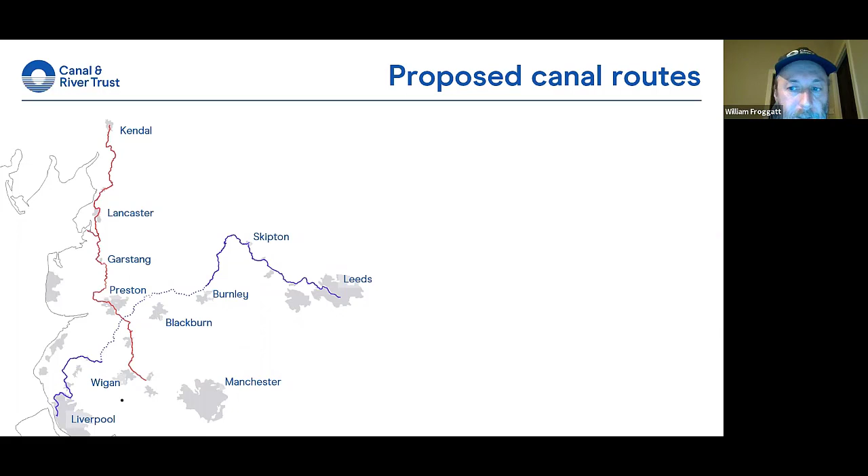And the reason why they eventually got their act together and agreed a route and started building it was because - let me just show my next screen - this shows progress of canal building by the 1780s. You'll see there was a canal from Gargrave to Leeds in the east, and there was a canal from Wigan to Liverpool in the west, and there was no canal in the centre. Remember, that was the bit that was going to go down the Ribble Valley.

But in 1790, when they were looking to complete the canal, they decided to change the route of the canal.

And instead of going down the Ribble Valley, they decided to take it down via Burnley, Blackburn, Chorley to Wigan, because there was coal in Burnley and coal in Blackburn.

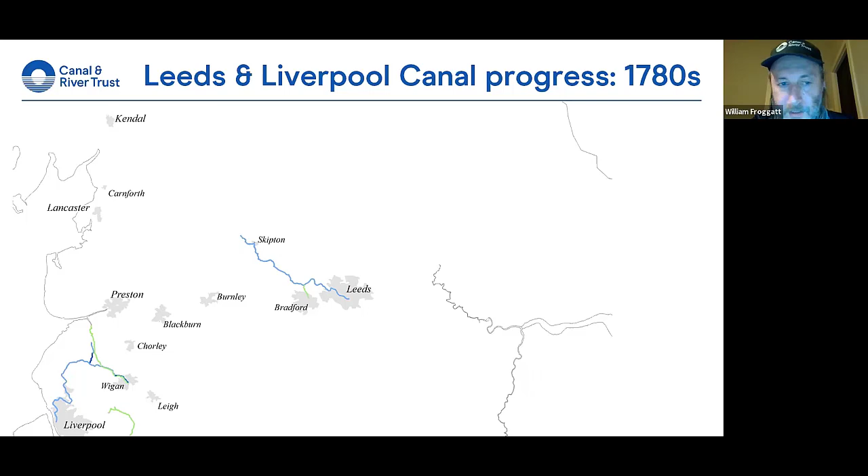Well, that proved to be a bit of a problem for the Lancaster Canal. If I just show you this next map, it's worth having a look at this in a bit of detail. You'll see here we've got Wigan, we've got Liverpool, and Leeds is over on the right hand side.

...the deviation of the Leeds and Liverpool Canal would cause a problem here, because it would be impossible politically to have two canals running next to each other just here. The landowners would never agree to something like that. And also there would be a shortage of water - there wouldn't be enough water to supply two canals.

So the Leeds and Liverpool Canal actually started what you might call a dirty tricks campaign, spinning - if we can use that modern term - against the Lancaster Canal, saying that it would never be built, so support our deviation. And this is what really made the Lancaster Canal get their act in gear and devise a route for their canal and get their Act of Parliament.

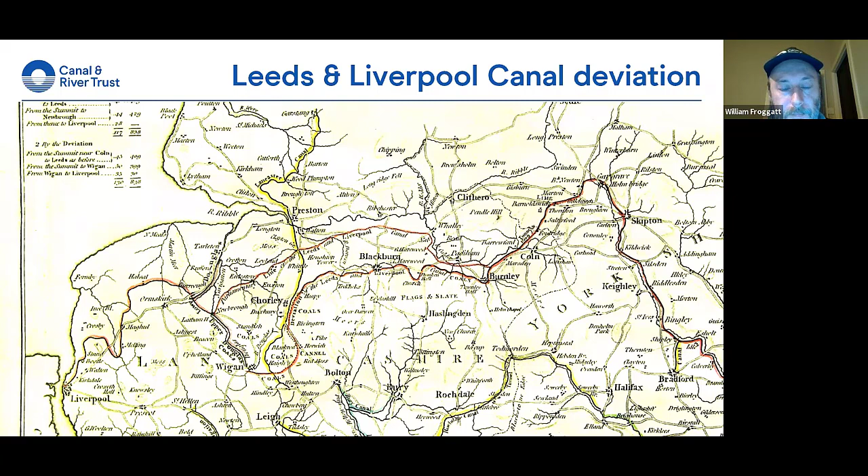And they got their Act of Parliament in 1792. Eventually they came to a gentlemanly agreement, and this slide basically illustrates that agreement: the Lancaster Canal would build this southern section, as it's known, down from around about Chorley down to Wigan, and the Leeds and Liverpool Canal would join on to that canal, sharing this section in the middle.

Although this section in the middle was built by the Lancaster Canal and was managed by the Lancaster Canal, and remained the Lancaster Canal until 1864, when it was leased to the Leeds and Liverpool Canal.

So that is why the Leeds and Liverpool Canal now, if you remember that first slide I showed you of the canal, goes from Leeds all the way down here to Liverpool. So this section down here, and not a lot of people know this, was originally the Lancaster Canal.

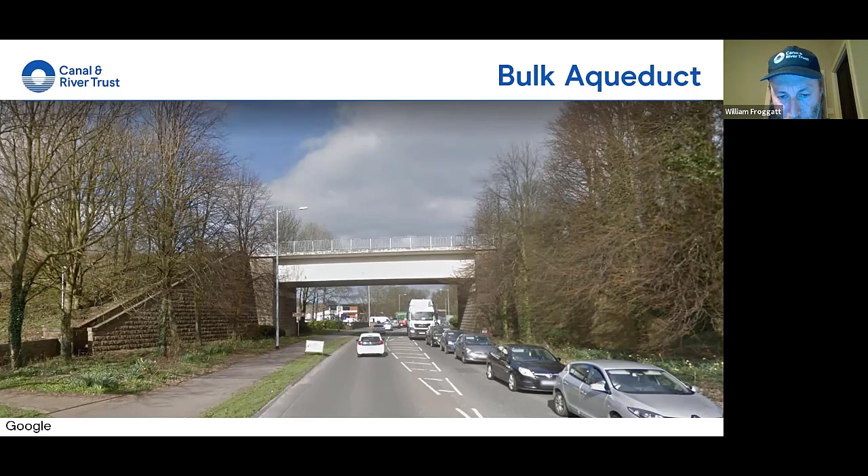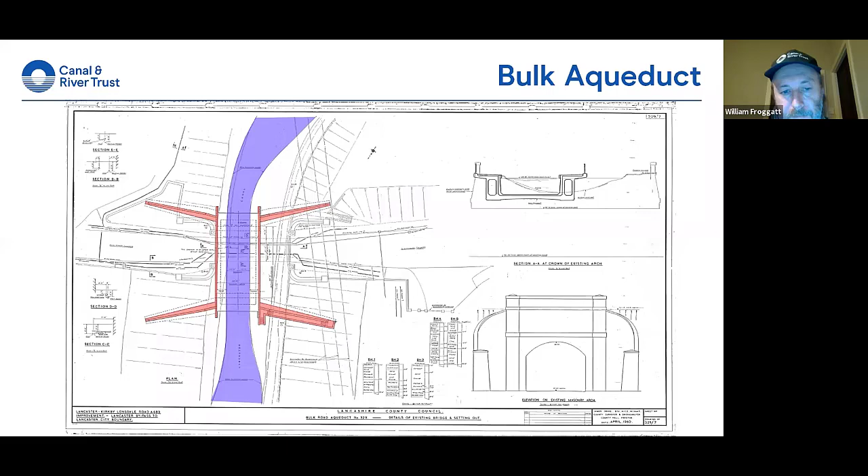When they built this road, they couldn't cut the canal south of this aqueduct off from the canal north of it, because the canal to the south would have dried up - the water for the canal south of there comes from the canal north of there. So they built this elaborate gantry structure, which allowed boats to be hoisted on and tracked across, but also underneath there is a water pipe so water could continue to go along the canal.

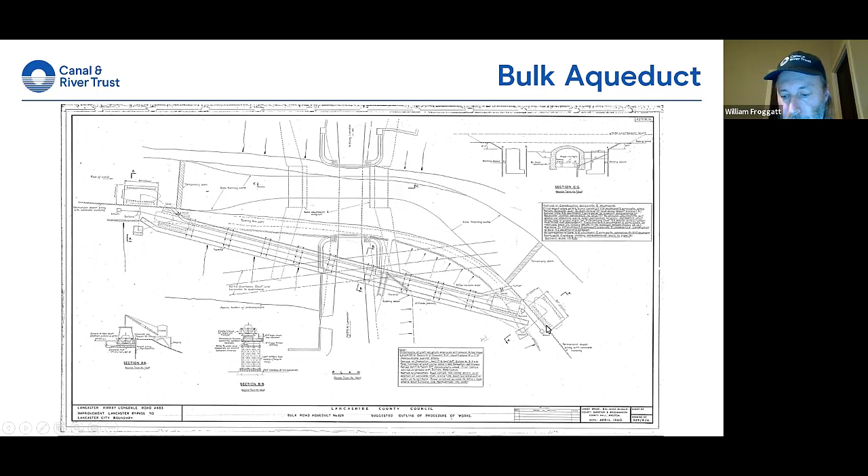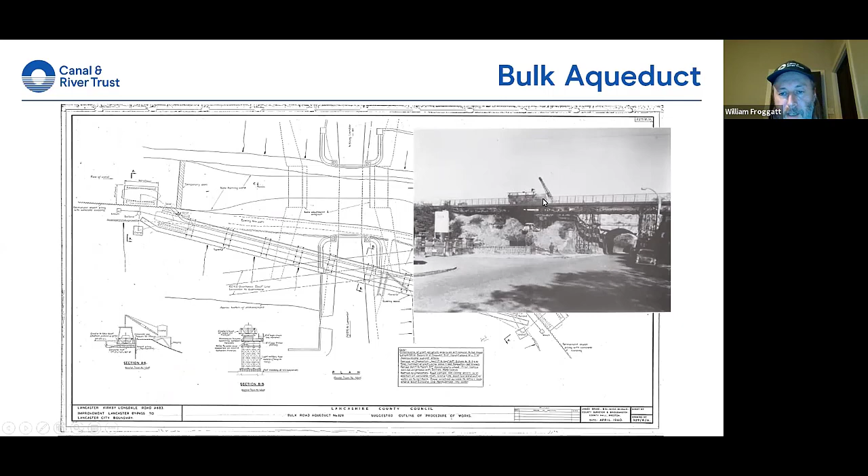There's a picture of it here - you can see the original aqueduct in the background, and a gantry in front of it with a boat being taken along to get onto the south section. Here is the original aqueduct. It's not quite as attractive as the Lune Aqueduct, but I think you'll agree it's more attractive than the new one - but also too narrow for all of the traffic they expected to be using this road.

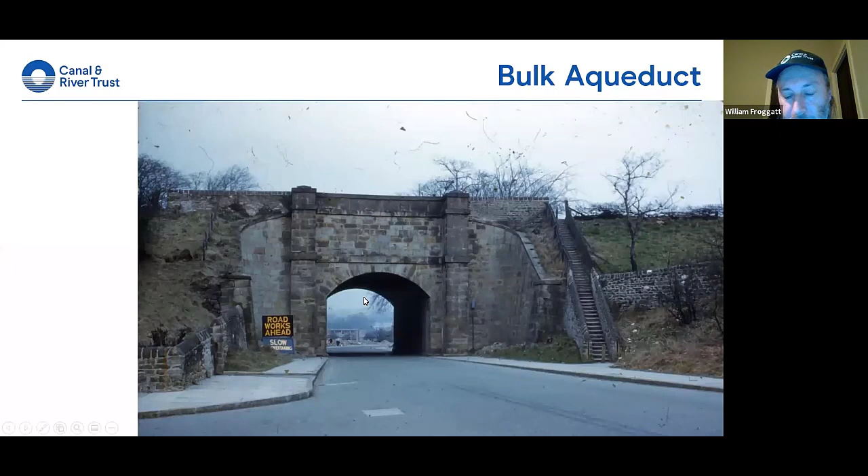You'll see on the right the specification is signed by John Rennie and John Pinkerton, who I mentioned earlier, and down here it says John Rennie, Invent and Delin, London, with a date, December 1792. That's Latin for John Rennie designed and drew this specification. Then John Rennie signed it, and John Pinkerton signed it because he agreed to build it.

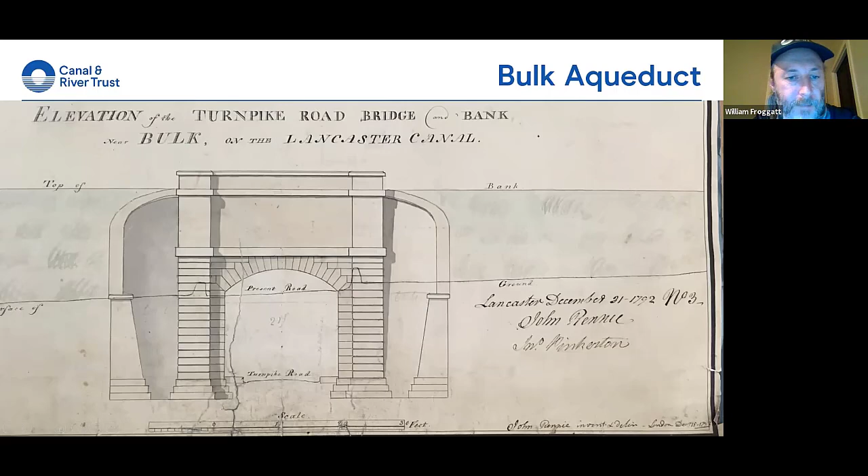There is a letter from Samuel Gregson to John Rennie, in which he says: 'The flat cap on the top of the pilaster at the Bulk Aqueduct will not have a good appearance. Could you not design something that will look more like a finished piece? The work looks well, and a little finish there would add to its beauty.'

John Rennie responded with this diagram. You'll see he's come up with six alternatives to decorate the pilasters - these sections here on top of the aqueduct parapet. Six suggestions: an obelisk that looks like a boat with a bow wave, an obelisk in the middle, some urns, possibly an acorn or pineapple, I'm not sure which, a ball, or nothing.

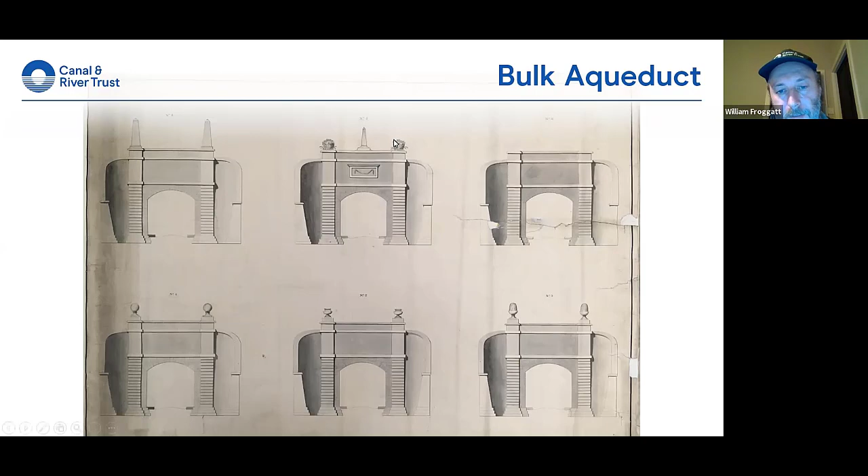As you might remember from the photograph, the committee decided on 'or nothing,' and I assume it was because it was cheaper than doing the other fancy bits, for want of a better word. So yes, there you go, the pilaster with nothing on it. They chose to go the cheap route.

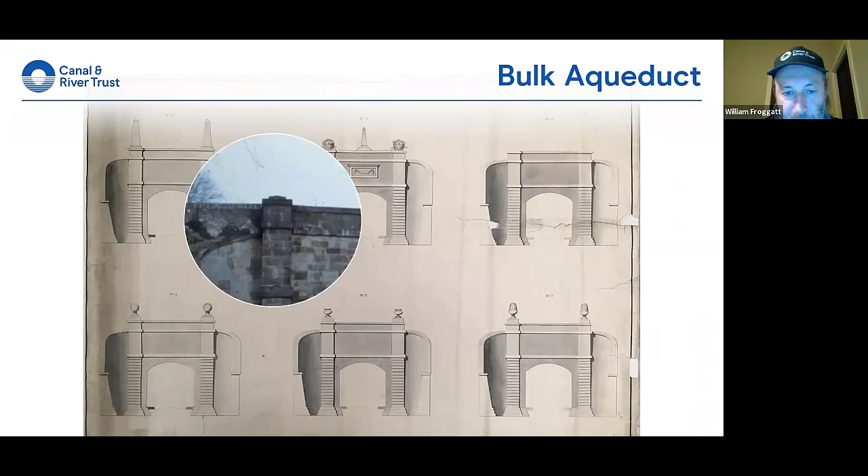And here is quite a devastating photograph of that poor aqueduct being demolished in the early 1960s. Clearly a time before we had any health and safety legislation, because it doesn't seem sensible to stand on an arch you're demolishing, particularly if you're not actually involved in demolishing it. A lot of people stood around with their hands in their pockets, a chap with a jackhammer chiseling bits of stone off into the bucket. The chap beneath the bucket doesn't even appear to have a helmet - no protection whatsoever if any of that stone bounces further down.

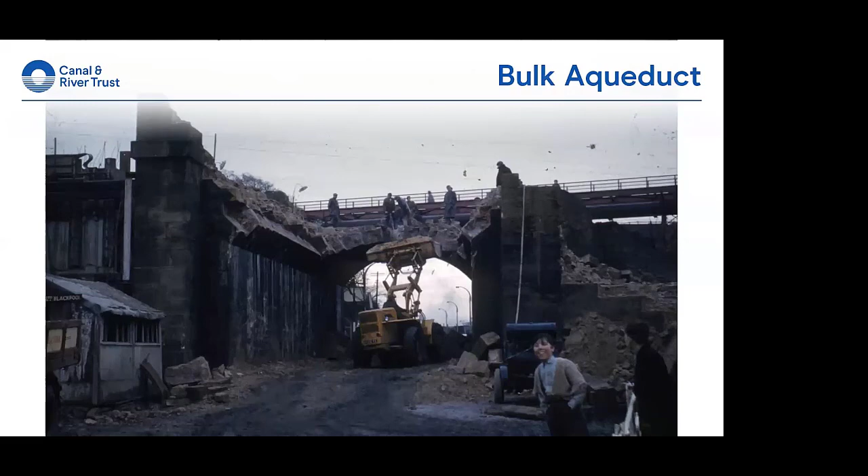You know, a kid stood in the front. Obviously that's not the sort of thing that would happen today. So a really great photograph, but quite a heartbreaking photograph at the same time.

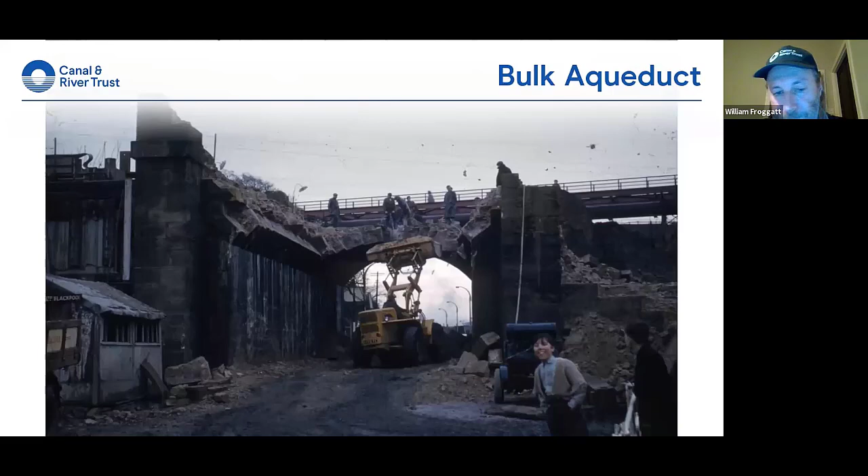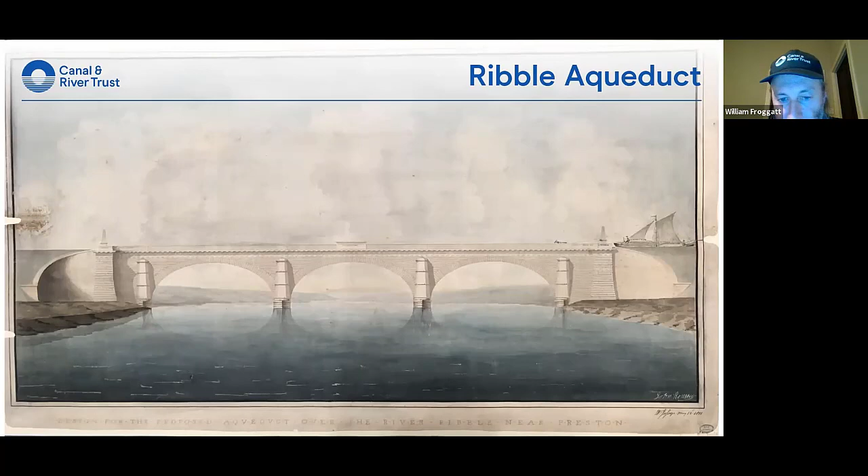This is a drawing of an aqueduct that was not built, again designed by John Rennie. If you remember at the start, I mentioned the southern section of the canal, south of Preston. This aqueduct would have taken the canal over the Ribble River south of Preston. Very similar, I think, to the Lune Aqueduct, but with ellipsoid arches rather than semicircular arches. It was never built, and some people say it's because the Lune Aqueduct cost so much. In its place was built a lot less auspicious, rickety thing, a timber aqueduct.

Now, the construction of that tram line did improve considerably the profits of the canal company, but it was never ideal. It was never going to be ideal to have to unload every boat and then reload it again. It added a lot of time and expense. But this temporary solution lasted for over 60 years, and the canal was never completed in that middle section.

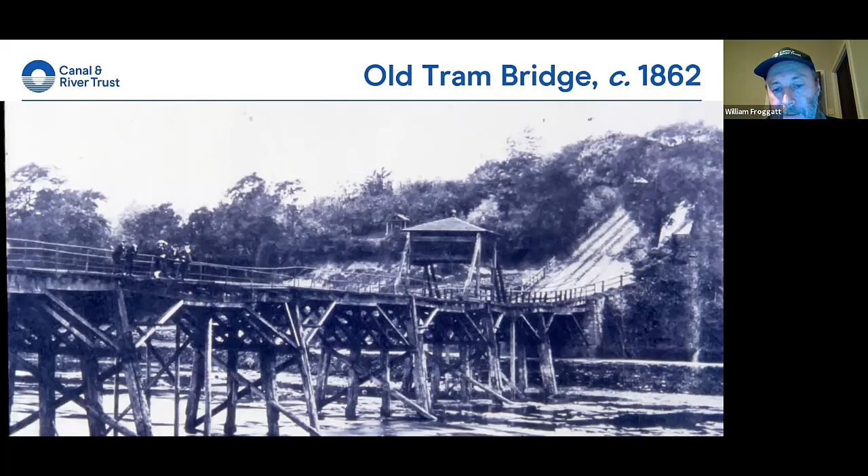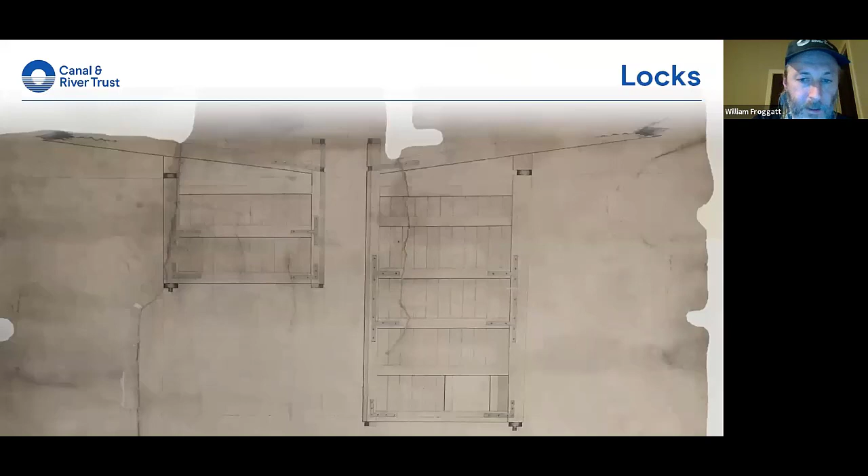The consequence: on John Rennie's original survey, he proposed 36 locks, and in the event, not a single one of them was built. The Lancaster Canal is famous, well, amongst people like me, for having very few locks. It has, in the end, 22 built, none of which John Rennie had identified on his survey, but there's 3 sections, some at Tewitfield, some on the Glasson Branch, and some down on Johnson's Hillock, which is now part of the Leeds and Liverpool Canal, but which was built by the Lancaster Canal.

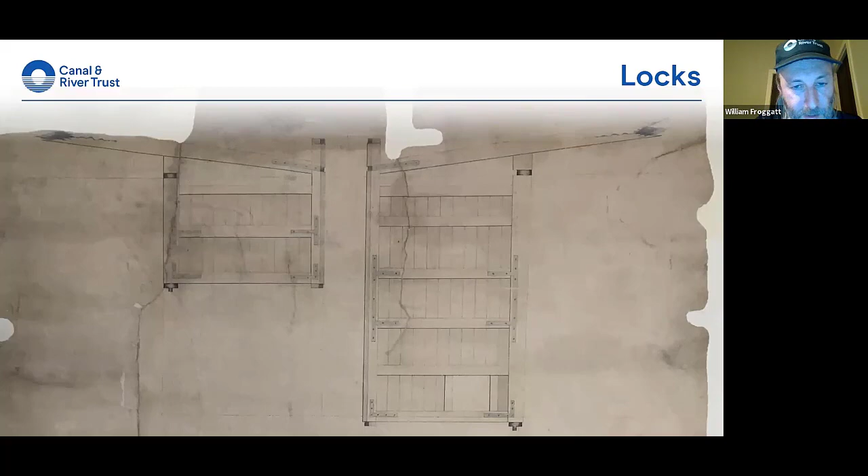I've just included these drawings of lock gates, just for something for you to look at whilst I was saying that bit. But the advantage of a canal which doesn't have many locks is that it's ideal for passenger transport, because the boat can travel quite fast and not have to constantly stop to get through locks.

And this is a drawing of what they refer to as the packet boat. Packet boat because it also served for delivering parcels, but this was essentially a passenger transport boat. I've just superimposed on there, on the plan at the bottom, the boat basically had 3 cabins. The forecabin on the right was the first class compartment, at the back the second class compartment, and in the middle the steward's cabin, where he would provide food and refreshments.

There are, interestingly, several contemporary descriptions about a journey on the packet boat. Really interesting, really adds a lot of colour to this. One of them, written by an anonymous fellow, says it's the best journey he's ever had, from Preston to Kendal. He set off at 1:30, arrived in Kendal at 9 o'clock. So that's about 7.5 hours, I think. Bit of quick maths.

It travelled at 9 miles per hour, was pulled by 2 horses. The second horse was ridden by a boy because the bridges were quite low, and if you were too big when you were riding a horse, the bridge would knock you off. The boy would ride the second horse, and drive the first horse. The helmsman on the boat had a horn and a whistle, and if the horses were driving too fast, he'd blow his horn, and the boy would slow the horses. And if he was driving too slowly, he would blow his whistle, and the boy would speed up.

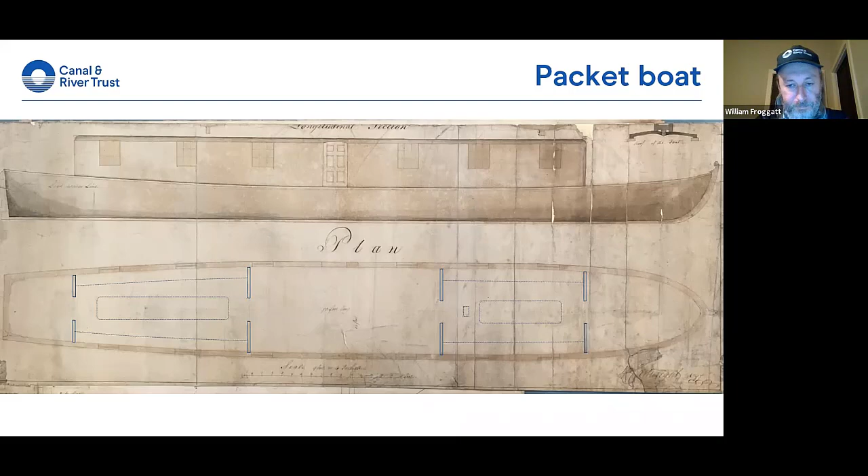I think there are some other rules. Yes, I've got some in the background. You can see a letter to a chap, John Moss, who was one of the owners - he ran one of the packet boats on behalf of the canal company. And down there you can see some rules which the canal company imposed. They weren't allowed to sell spirituous liquors, so whiskey, vodka, gin, that sort of thing. But they were not prohibited from selling malt liquor, so beer. They could sell beer. They had to provide tea, coffee and other refreshments. Obviously veal pie and plum cakes is what they supplied, and they had to keep the windows in good repair.

That seems a bit random. And then there's something about the charges that were charged. But the wandering trio describe how you would get on and off the boat. Obviously you could get on at Kendal, or at Lancaster or Preston, but you could also, if you wanted to, request to stop along the canal and get off anywhere, basically.

The wandering trio say, and I'm quoting here: 'At occasional bridges, the passage boat is drawn towards the side and some passengers quickly leap to the shore and stumble against the expectant attendants. His luggage is clumsily ejected after its owner. The postilion cracks his whip, the rope tightens and leaps from the water with a shower of drops, and we're off again.' I think the image of someone diving headlong off the boat, flying into the people waiting for him, and his luggage being thrown after him, really underlines the importance of speed here and the need to keep the journey as quick as possible, because by the 1840s, 1846 when that was written, they were competing with the railway line by that point. So speed was of the essence.

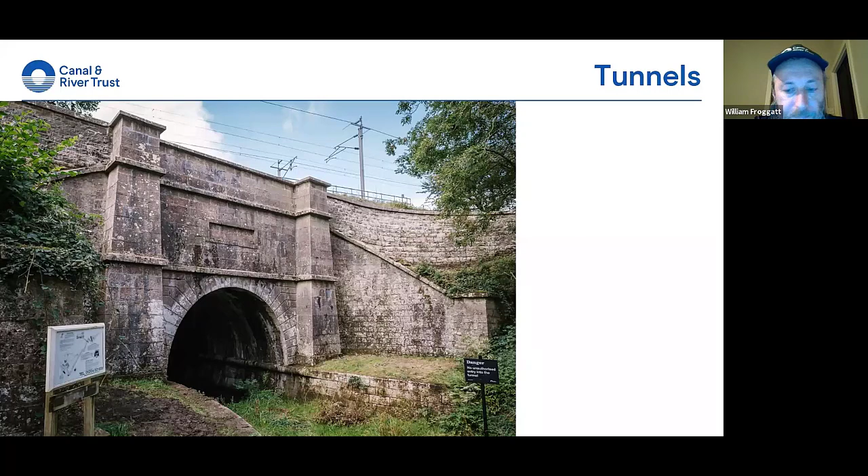The cost of building it from limestone was going to be phenomenal, so they investigated using bricks for a year. They wrote to a chap called Benjamin Bevan, a canal engineer down in the south of the country, who was very familiar with bricks.

Essentially, the letter says we don't have suitable stone, and we're thinking about using bricks, seeking the advice of Benjamin Bevan from Leighton Buzzard, as it was.

The other thing was that Thomas Fletcher, at the time, was living in Heversham, down near the location of the Hincaster Tunnel. He noted that over towards the river, on the floodplain, there was a good source of clay which could be used for making the bricks. Incidentally, Woodhouse, just here, is where the limestone came from.

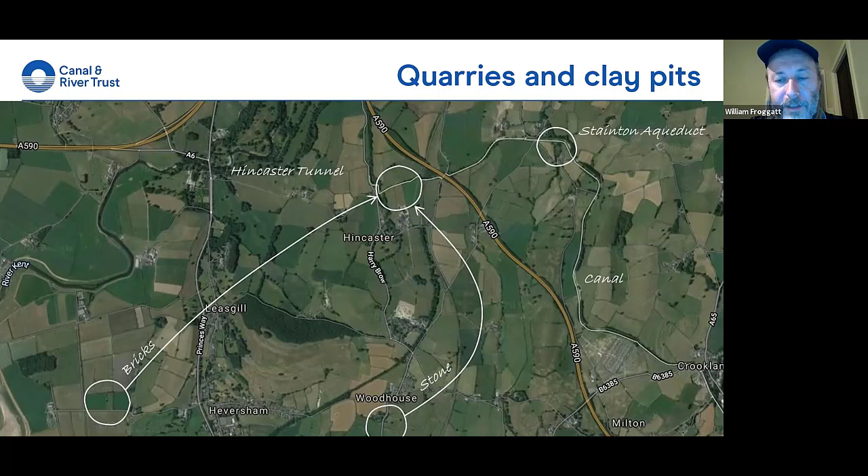If you look in this circle, we've got some fairly square fields, and this one here looks a bit higgledy-piggledy at the right-hand end. That is the remains of the clay pit the bricks were made from. In the event, the committee decided to use bricks because it was cheaper.

The tunnel was awarded the Transport Trust Red Wheel a couple of years ago. The Transport Trust is a charity which celebrates the historic transport network, railways, canals, etc., and they award their red wheel to structures they consider important for the development of the transport networks.

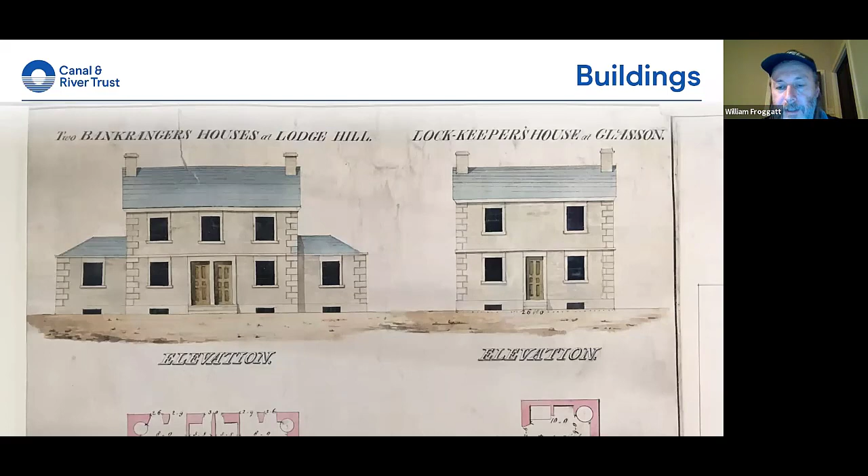The house on the right is at Glasson, the lockkeeper's cottage, still there, you can see it here. It has a very strong Georgian appearance. So there may be something in that theory, but I've never researched it.

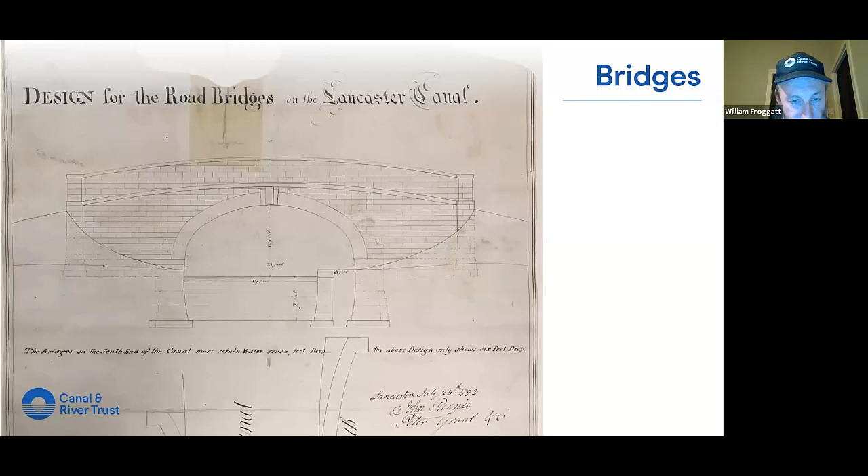It was done, I think, when the canal was built, when the bridge was built. And the only theory I have for it is that in myth and legend, it's often said that evil lives under bridges, Billy Goat's Gruff and all that sort of stuff. These faces were there to scare off the evil from underneath the bridges. So if you're ever on the canal near Catterall, Bridge 53 I think it is, look out, see if you can see those faces on the bridges.

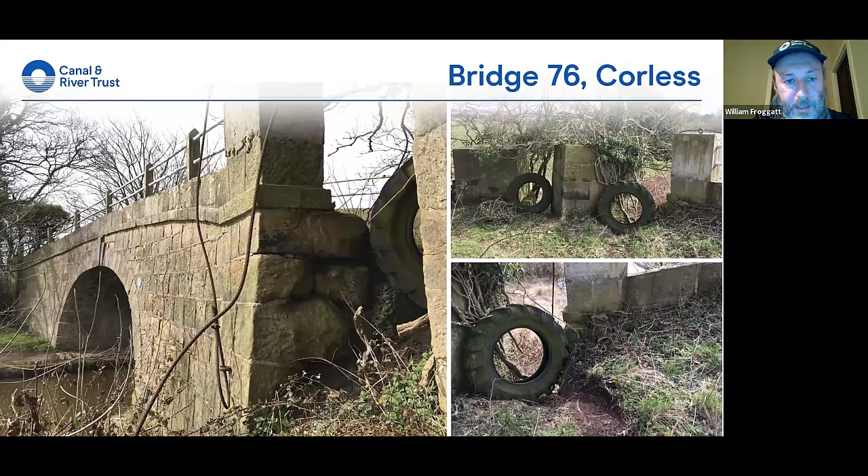So an interesting addition, I think, to the history of the canal. And I've gone over a little bit, so I apologise for that. But that is my final slide. And if anyone has questions, I'll be very happy to take them.

Thanks, Bill. That was brilliant. Really, really interesting, and just some incredible architecture there, some of which still exists and some which doesn't, sadly. Yes, amazing. Wouldn't it be lovely if our canals were much more navigable than they currently are? I know that's one of the plans, hopefully, for the Lancaster Canal. It'd be great to see some used commercially again, to get some lorries off the roads. Absolutely, there's something to be said for that, without a doubt.